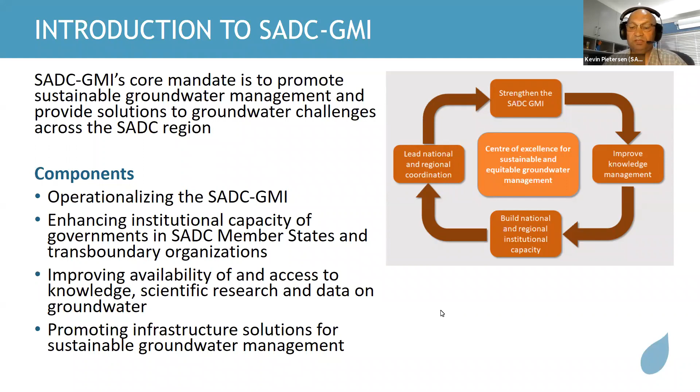And it's under that specific component that the operation and maintenance groundwater manual was launched or initiated.

The SADC GMI, under promoting infrastructure solutions for sustainable groundwater management, has initiated several pilot projects throughout the region, some of which are listed in the slide.

Here I highlight just an example. In Malawi, a typical water supply project would involve groundwater exploration, siting, drilling, and equipping boreholes to reticulate water to communal distribution points around the community, culminating in supplying water to approximately 15,000 inhabitants in a specific community within Malawi. There are examples of this type of project initiated throughout SADC.

And out of this came the wish to consolidate our knowledge around the operation and maintenance of groundwater infrastructure and develop a manual that can be used across the region in dealing with this specific important issue.

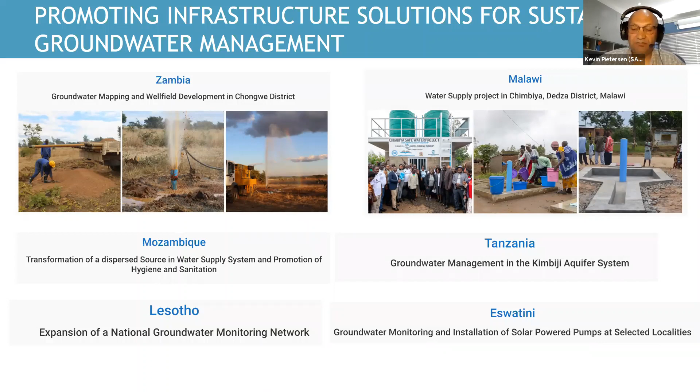I think it's important to highlight that groundwater infrastructure can be considered critical infrastructure, as it is socially, economically, or operationally essential to the functioning of a society or community, both in routine circumstances and in the extreme circumstances of an emergency.

The provision of infrastructure services such as clean water and sanitation is essential for human health and the creation of economic welfare. However, groundwater infrastructure should not be viewed in isolation, but rather as part of a system comprising a portfolio of interlinked assets that provide essential services for society.

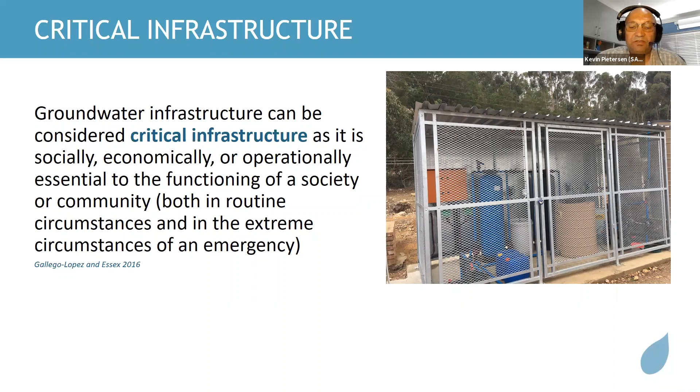In the SADC region, there is a large variety of groundwater schemes and technologies, ranging from relatively simple spring protections and hand-dug wells equipped with ropes and buckets, to more sophisticated hand pumps and mechanized boreholes. At the upper level of complexity are multi-borehole schemes with storage buffers and extensive reticulation serving large areas with complex operation and maintenance characteristics.

It is thus imperative that the infrastructure that brings water to communities is always kept functional. However, it has become clear that limited accessibility to groundwater resources in most areas is more frequently a function of the functionality of the infrastructure, supported by numerous studies and also a questionnaire conducted amongst member states, than the physical availability of the groundwater resource.

Non-functionality of the infrastructure is also related to infrastructure vandalism, which unfortunately is prevalent throughout many countries in SADC.

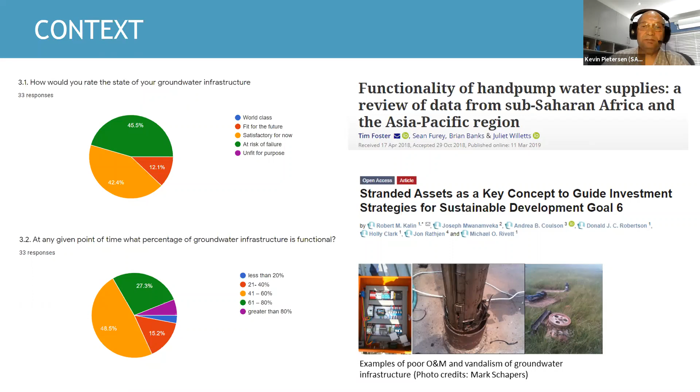A number of operation and maintenance challenges manifest themselves within the SADC region. This includes insufficient public funding for infrastructure, annual budgets not suited to stable multi-year operation and maintenance needs, lack of skilled staff, no life cycle view in design and build, no integrated budget, inappropriate system design, poor borehole drilling and technical specification, and aging infrastructure.

Also non-availability and high cost of spare parts, vandalism as previously mentioned, weak planning, regulation and coordination, and limited involvement of stakeholders. So these were some of the critical operation and maintenance challenges identified by member states.

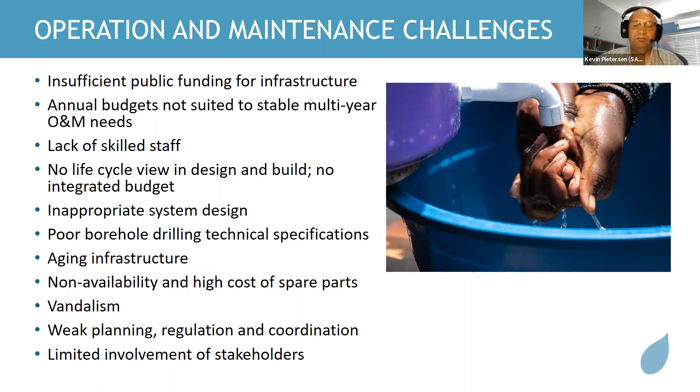Unfortunately, there has been chronic underfunding of infrastructure, resulting in an infrastructure gap. To close the infrastructure gap, an important lever is to optimize existing assets through proper operation and maintenance.

In this regard, SADC GMI has commissioned this training manual for operation and maintenance of groundwater infrastructure in SADC. The purpose of this training manual is to provide support for groundwater infrastructure development solutions that can improve management of small groundwater schemes throughout SADC.

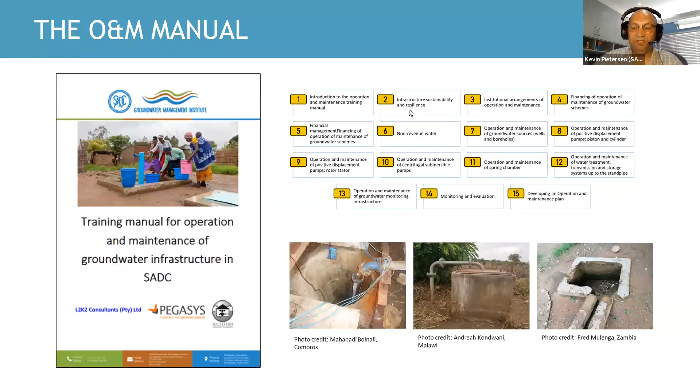The target audience for the operation and maintenance manual includes water supply managers, technical staff, plant operators, and water practitioners.

We supplemented the training manual by holding a training course. The course was planned as a face-to-face training course; however, the onset of the COVID pandemic made this option not feasible. To mitigate this, the training course used the CapNet virtual training platform and was both instructor-led and self-paced.

To a certain degree, the onset of the pandemic, and the opportunity to host it on the virtual platform, makes the type of information, presentations, and learning materials we developed for the course much more accessible. That can now be readily made available across the region, across the world, for that matter. The first part of the training program consisted of a series of online presentations by developers of the training manual.

Following the second part of the training course, which was self-paced, participants were expected to examine reading materials and videos in support of the presentation and exercises.

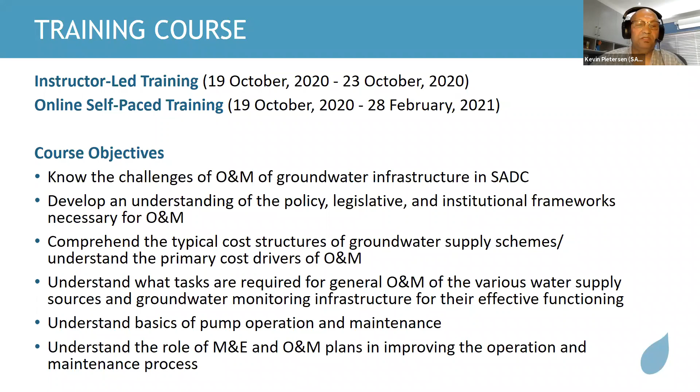The course was intended for participants to know the challenges of operation and maintenance of groundwater infrastructure in SADC, develop an understanding of the policy, legislative, and institutional frameworks necessary for operation and maintenance, comprehend the typical cost structures of groundwater supply schemes, and understand the primary cost drivers. Participants should also understand the tasks required for general operation and maintenance of various water supply sources and groundwater monitoring infrastructure, the basics of pump operation and maintenance, and the role of monitoring and evaluation and operation and maintenance plans in improving the process.

The course also focuses on practical skill. Because of the COVID pandemic, we had to be innovative, using group work, video demonstrations, and case studies. We planned visual or live demonstrations, for example of pump maintenance, but unfortunately because of COVID that was not possible. In follow-up courses, we envisage practical demonstrations would form part of this course.

For example, how to size and replace a pump for an existing installation. We would give participants the results of a hydrogeologist report and details of the scheme and pumping main, as well as copies of pump catalogs and pump curves. The participants will then use the information to select pumps and develop a schedule of operation and maintenance tasks for the operator of an automated electrical submersible water pump. That was just one type of exercise built into the course to deal with specific scenarios or issues.

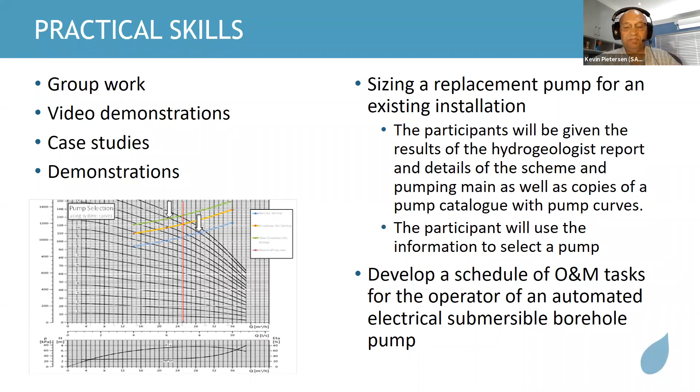The training manual has 15 chapters dealing with the type of groundwater infrastructure found in the SADC region, but also considers institutional and financial aspects. Chapter 1 is an introduction to the operation and maintenance training manual. Chapter 2 focuses on infrastructure sustainability and resilience. Chapter 3 looks at institutional arrangements of operation and maintenance. Chapter 4 focuses on financial management aspects, and chapter 5 on financing of operation and maintenance of groundwater schemes.

We also introduced non-revenue water, specifically within an urban context within groundwater supply schemes. Then we go into the technical parts, focusing on operation and maintenance of groundwater sources, wells and boreholes; positive displacement pumps including hand pumps; positive displacement rotor-stator pumps, typically mono pumps; and centrifugal submersible pumps, as well as spring chambers. Chapter 12 touches on operation and maintenance of water treatment, transmission, and storage systems up to the standpipe, though that was not the focus of this manual, so we just highlight some issues there. Chapter 13 focuses on operation and maintenance of groundwater monitoring infrastructure, and the last two chapters focus on monitoring and evaluation and the importance of developing an operation and maintenance plan.

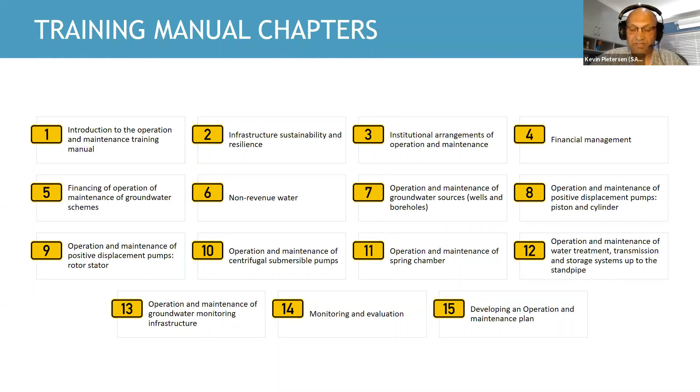Perhaps the most important issue is the question of funding. Unfortunately, I cannot deal with all the chapters of the manual in this presentation, so I will highlight only one or two chapters to give you a sense of what the chapters entail.

The chapter that focuses on financing of operation and maintenance of groundwater schemes deals with the issue of funding, as without adequate funds, the best laid operation and maintenance plans will fail. Funding is intimately tied to the legal, political, and institutional context of each country or region, and issues such as willingness to pay and existing community operation and management schemes become important. In general, the funding of operation and maintenance in SADC is difficult and complex for a range of reasons. Questions revolve around the proportion of costs that should be contributed by users, with the full economic cost of a scheme and its operation and maintenance considered a desirable goal by governments, but in practical implementation, not a reality.

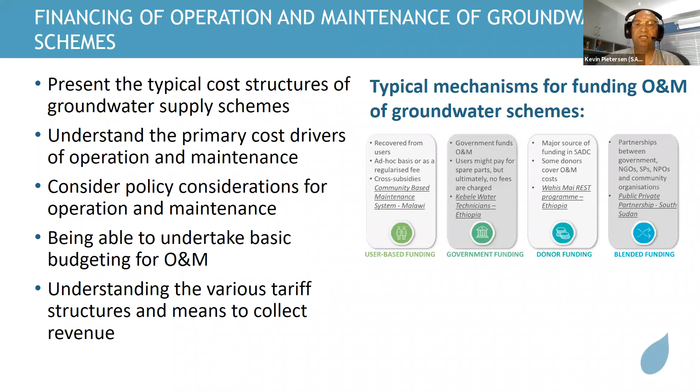So we also focus obviously on hand pumps, because this is the pump most used for potable water supply. We also do have windmills specifically in South Africa and Namibia, which seems to be also a water supply option. But common examples in our region include the AfriDev, the India Mark II, and then the Bush pump, which is predominantly used in Zimbabwe.

As a result of the widespread reliance of communities on hand pumps for their primary water supplies and the issues around standardization, local supply, operation, maintenance, and repair, a lot of work has been done studying the issues and providing the resources to assist people working in the field with hand pumps. So in our manual, we cross-reference this work, especially, for example, work done by the Rural Water Supply Network, which has a lot of practical information related to the operation and maintenance of hand pumps.

But basically what we try to do is understand the basics of operation and maintenance of hand pumps, be able to troubleshoot and establish appropriate remedial action, and appreciate the link between operation and maintenance and sustainability of water supply. Next slide, please.

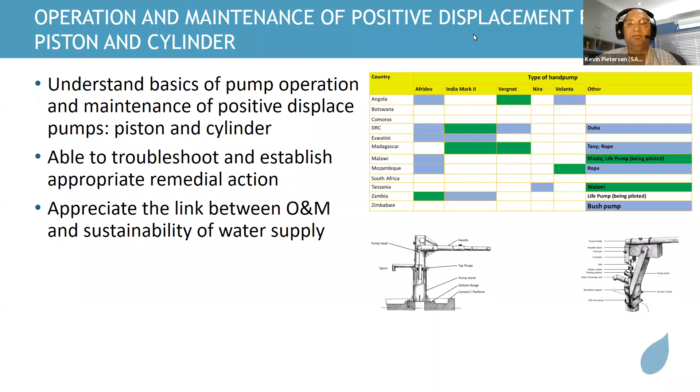We also have a chapter that deals with the operation and maintenance of centrifugal submersible pumps. This pump seems to be the most used motorized borehole pump in our region, the SADC region. There are many manufacturers and suppliers, and the pumps are made in almost all sizes to meet the needs of any borehole installation, from small 3-inch diameter pumps for small boreholes to 12-inch diameter borehole pumps. The pump is closely coupled with a pump motor, with both having the same outside diameter, such that both can be inserted into the borehole to optimal pumping depth.

But we found that the most common application for submersible pumps is basically run to fail, as it becomes too expensive to pull and maintain the pumps. So the operating paradigm, especially in deeper boreholes, is basically to run the pumps to fail and then replace them at that point in time, rather than pull them on a regular basis for maintenance.

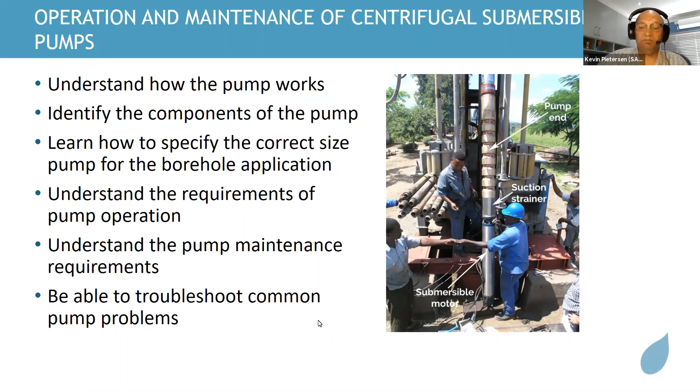But in this chapter, we attempt to understand how the pump works, identify the components of the pump, learn how to specify the correct size for the borehole application, understand the requirements of pump operation, understand the pump maintenance requirements, and also be able to troubleshoot common problems. Next slide, please.

I think one lesson is, it's important to correctly size your submersible pump, and that is that we need to match a borehole with the submersible pump that is designed for its anticipated duty. This includes the flow rate, the pumping head, and the water quality. In some cases, pump selection is an afterthought, and the main pump selection criterion may be whether the pump fits the borehole and whether it falls inside the budget. So incorrectly specified pumps fail more often and can put stress on other parts of the supply system.

And it is important to recognize that bigger pumps are not always better. Bigger pumps require a bigger electricity supply, larger pipes and valves, and installation equipment. The bigger the pump, the more energy is lost in pipe friction. A smaller pump running 24 hours a day is more efficient than a large pump operating for a few hours a day and costs less to purchase and maintain. And too high pumping rates can draw the water level down, creating oxidizing conditions in the aquifer, which can impact water quality, leading to borehole clogging. Next slide, please.

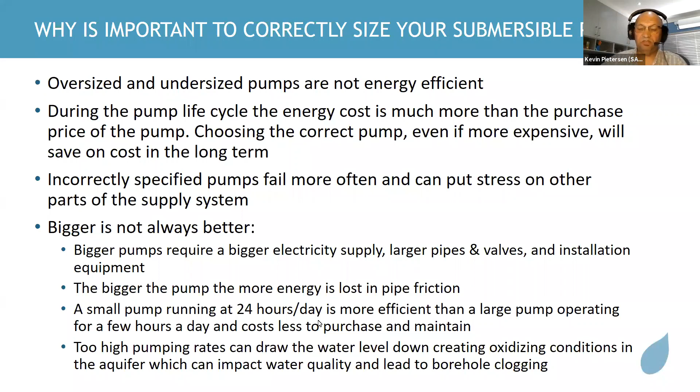So we also talk about operation and maintenance of groundwater monitoring infrastructure, and because of the vandalism issue, people had to create technical solutions in terms of casing, special padlocks and purpose-made borehole caps to protect the boreholes from vandalism. We speak to those types of issues, but in the end, vandalism can only be resolved through community engagement. So in this chapter we work on understanding the importance of groundwater monitoring, describing the monitoring infrastructure, and understanding the groundwater monitoring operation and maintenance tasks. Next slide, please.

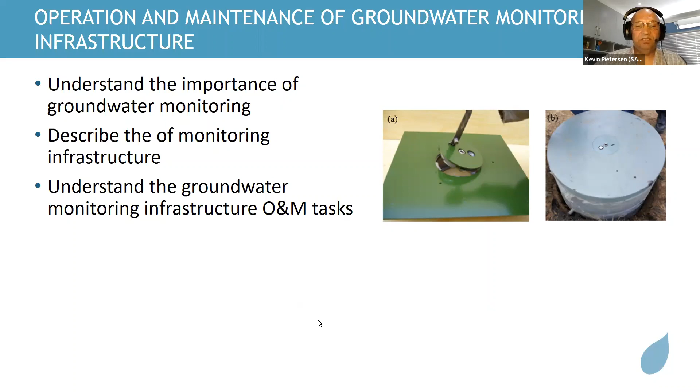So potable and readily available water is important for public health, whether it's used for drinking, domestic use, food production, or recreational purposes. Absent or inadequate potable water supply services expose citizens to preventable health risks, including diseases such as cholera. So an ineffective operation and maintenance system perpetuates a vicious cycle of poverty. So our aim is to inculcate the importance of operation and maintenance and the value of an effective operation and maintenance system, so that we've got a virtuous cycle. Next slide, please.

So to conclude, our hope is that the training manual provides support for groundwater infrastructure solutions that can improve management of small groundwater schemes throughout SADC, and reflects SADC GMI's commitment to promote sustainable groundwater management and solutions to groundwater challenges in the SADC region through building capacity, providing training, advancing research, supporting infrastructure development, and enabling dialogue and exchange of groundwater information.